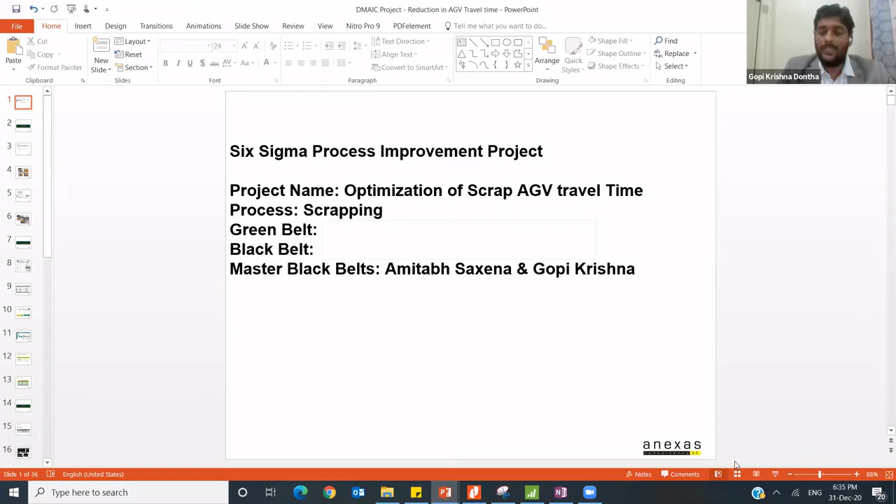So today, the first project I'm going to show you is in a manufacturing organization. This project I have guided and completed in one of the manufacturing organizations in Saudi Arabia. This is in fact an aluminum manufacturing organization. So the title of this project is optimization of scrap AGV travel time. So here in the organization, they're manufacturing aluminum, and they have different mills, rolling mills, hot mills, and cast houses.

So the scrap AGV is an automated guided vehicle. The operation of this AGV is to carry the scrap from one unit to the other unit, and when they are doing this process, the automated guided vehicle is stopping in between due to failures.

So we took up this project to reduce the travel time, especially whenever it stops and the scrap is accumulating and causing problems in the mills and workshops. So now we are going to show how we have identified the root causes using Lean Six Sigma methodology, how we implemented the solutions, and the benefits we got after implementing them.

So the process is scrapping, and the master black belts are myself and Amitabh Saxena. We have guided these projects. Before moving forward, I would like to give you a brief introduction on the process.

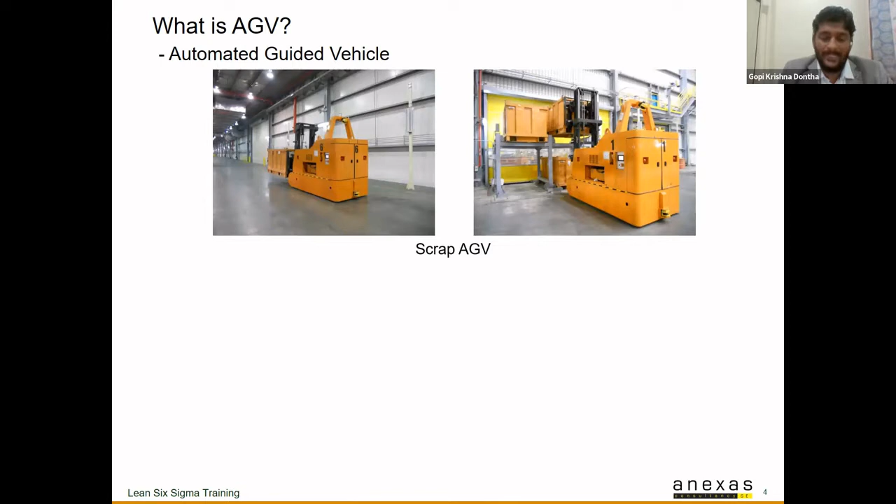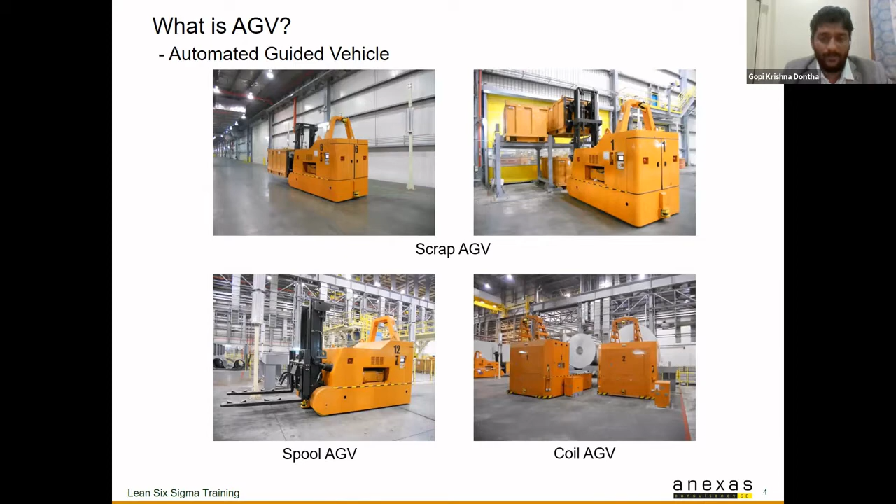AGV stands for automated guided vehicle, and this is how the vehicles look. These are the scrap AGVs, the first two pictures. This is a spool AGV, working in the mills, and this is a coil AGV, used after completing the aluminum coil. Now our focus is on reducing the time of the scrap AGVs, which are taking more time to carry the scrap from one area to another.

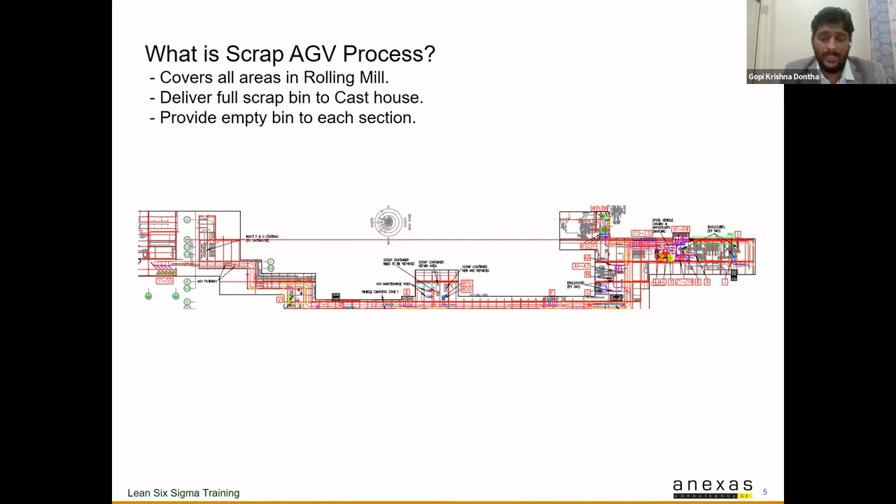This is how the plant looks. It covers the areas in the rolling mill and delivers the full scrap into the cast house, which you can see on the left side. These are the 13 stations where scrap is accumulated, and the AGV takes the scrap from these 13 stations and delivers it to the cast house. We are taking this project to reduce the travel time from this area to the cast house, and then it returns the empty scrap bins to the rolling mills.

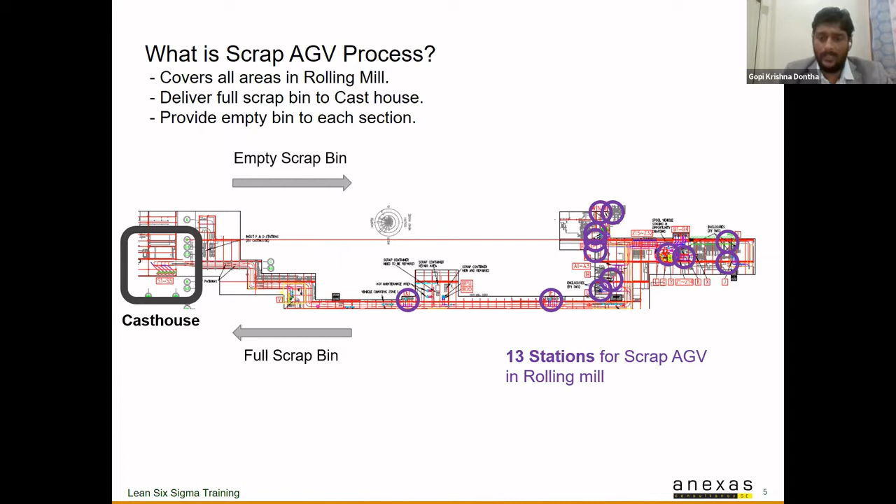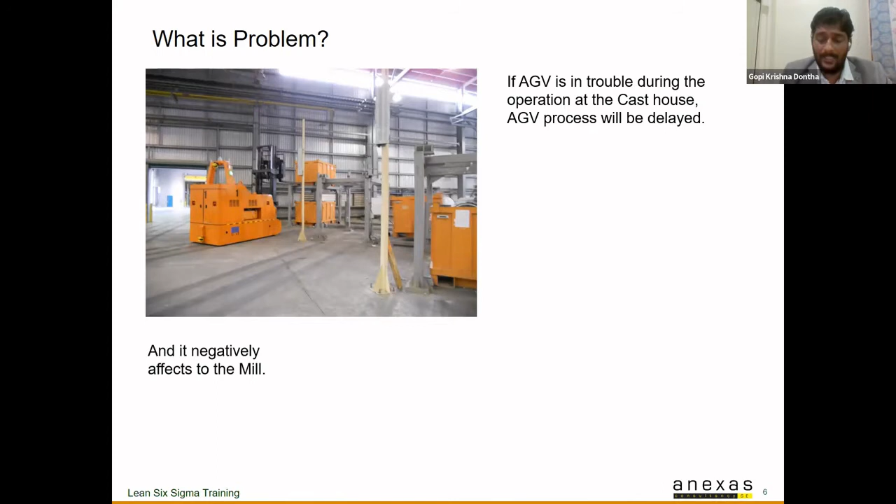So what is the problem? Sometimes the AGV stops due to failures. When it stops, the scrap is accumulated and we have production issues, and it negatively impacts the mill production. This is how it stops in between.

We implemented a DMAIC approach, and in the define phase we defined the problem we are facing in the organization. We explained in the business case why we are taking up this project. The project is linked directly to the mission, vision, and strategic objectives of the organization.

Optimizing AGV travel time will improve customer satisfaction, because we have different mills in the organization and they are the customers. It also reduces the stoppage of our AGV and encourages the AGV to have more choices to transfer the scrap. The AGV travel delay cost approximately 196,475 US dollars in financial loss over the past 3 months.

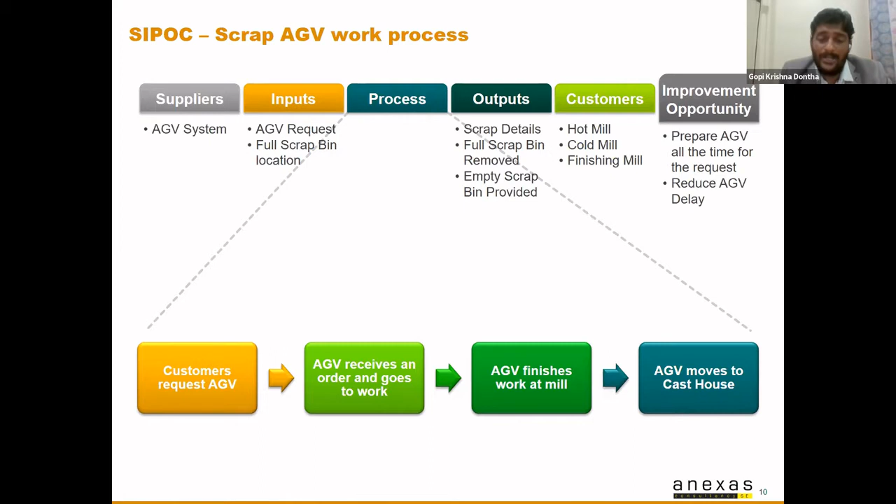And the inputs required to do this are the scrap bin, the location of the scrap bin, what kind of scrap it is, and then the request. We have the supplier who is providing the AGV, which is the AGV system. So this helps us understand the process in a high-level way.

We also have the AGV operator involved. Whenever the AGV stops in between, it sends a signal to the operator saying there's so and so problem, and then the AGV operator fixes the problem.

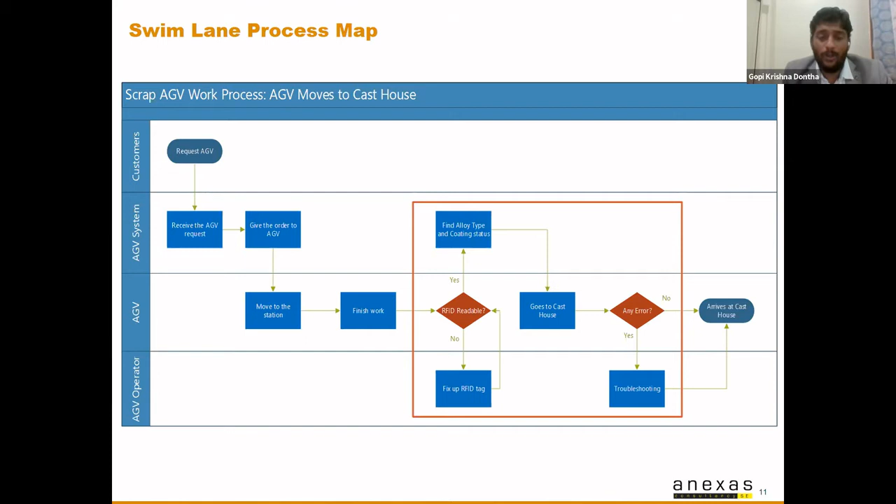Then once we understand the process, we further collected the voice of customer. We use QFD to understand the voice of customer.

When we collected the data, we came to know these are the problems customers face from the AGV: the AGV is not available, it arrives late, it stops in between during the work, it shows some errors on the path, and it is also causing some problems to the work.

We assigned some priorities. The first priority is rated on the higher side, which is 5, meaning very important to the customer, and then 4 after that, followed by 3 and 2. So first we are focusing on solving the problems which are AGV not available and late arrival of AGV, and then AGV stoppage during the work.

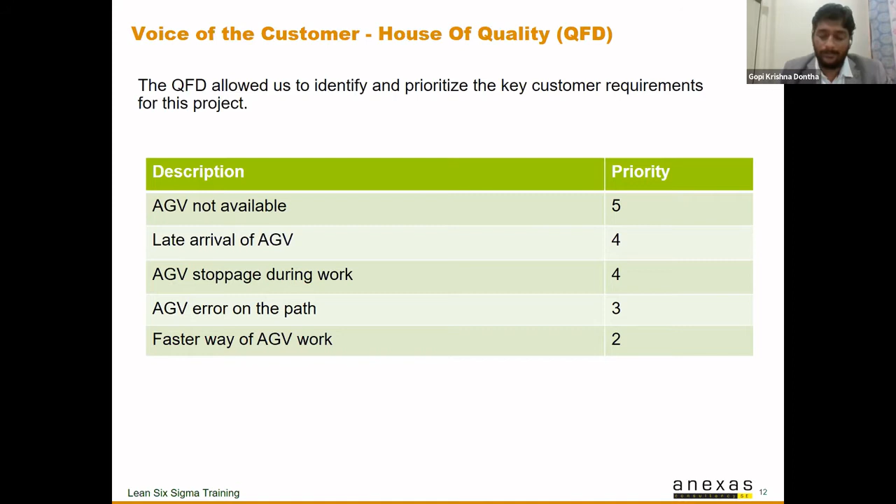Then this was about the define phase. We have defined the problem, collected the data from the customers, given priorities, and also understood the process at a high level.

Once we define the problem, we move on to the measure phase. What we need to do in the measure phase is collect data from the process. The data is from the AGV system database, and we collected the last 3 months of data, from June to August 31st, 2018. The data collected from the AGV includes AGV transaction life cycle, AGV optimal transaction time, charging time, and delay time. These are the data factors we identified and collected.

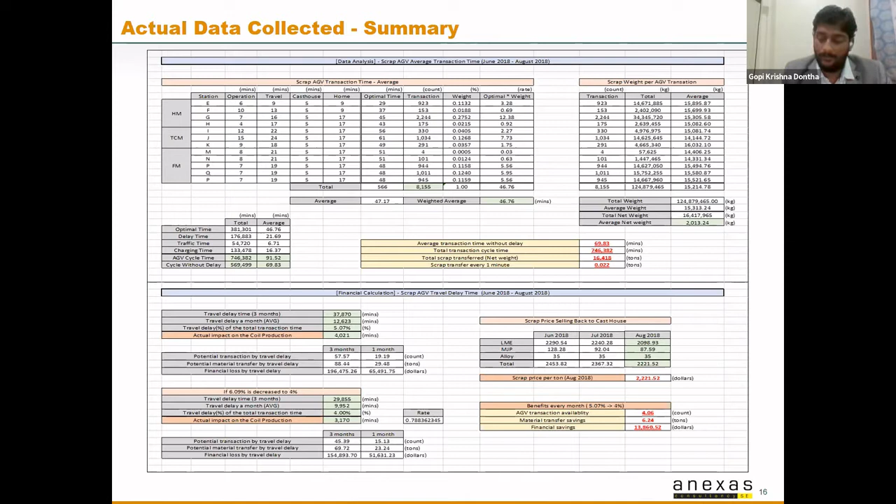Once we collected the data, we started understanding how the process is behaving, whether the data is normal or not. You can see this graphical summary which tells us the average travel time of the AGV, the standard deviation, and other descriptive statistics.

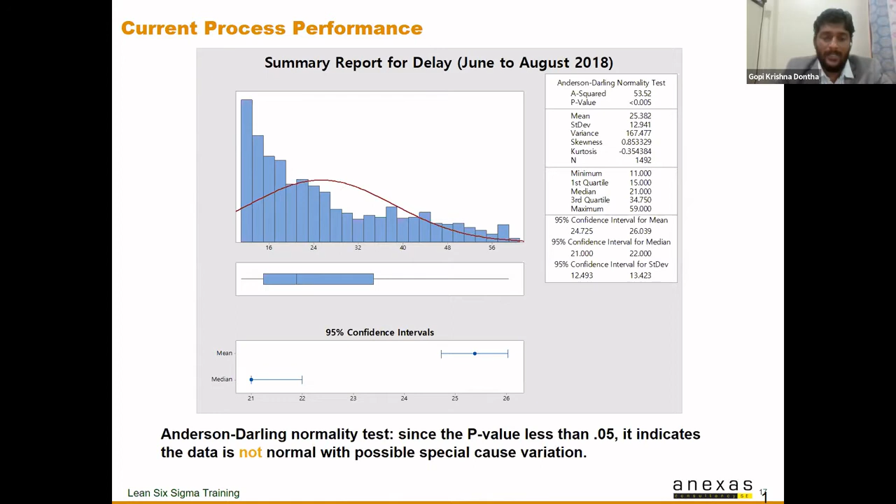We also looked at the normality of the data, whether it is normally distributed or not. Based on the graphical summary, we got a p-value less than 0.005, which means the data is not normal. The test we did is the Anderson-Darling normality test, and since the p-value is less than 0.05, it indicates the data is not normal.

Once after collecting the data, we started understanding the capability of the process. We measured the sigma level of the process and understood the Cp, Cpk values. The sigma value of our process was 2.19 sigma.

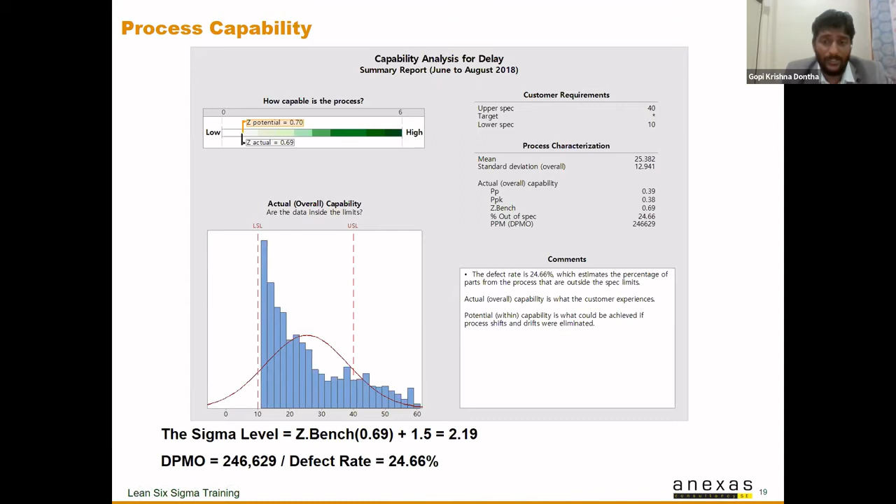The defects we are producing are whenever the AGV stops. Currently, out of 1 million opportunities, the defect rate is 24.66%, and the DPMO is 246,629. We set the upper and lower specifications: lower is 10 minutes, and upper is it should not take more than 40 minutes. Whenever it takes less than 10 or more than 40, it's a defect for us. So we have a total defect rate of 24.66% in the current process, and the sigma level was 2.19.

This was understanding the process performance. Once we understood the process performance, we started collecting information on why we are having 24% defects and what are the problems causing these failures. We conducted a brainstorming session with the people working with the process, and we also collected data on the failures.

The most frequently occurring failures are RFID failures on the AGV, obstacle detected, and AGV lost its position. We did a Pareto chart to understand the most frequently occurring cause. Out of these three, RFID failures occur very frequently, approximately 71% of the time, followed by obstacle detected and then lost position. So the most frequently occurring causes are RFID failure and obstacle failures, and we are going to work on these causes.

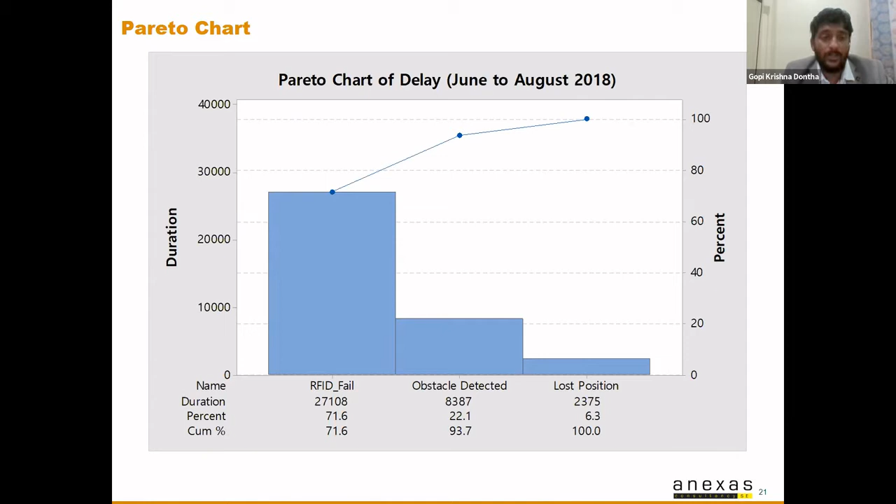And then we did a further cause and effect diagram. We performed brainstorming with the process owners and the people working in the process, and we identified the possible causes or potential causes.

So these are the potential causes because of which the AGV is taking delayed travel. We have named them X1, X2, X3, and X4, and we have categorized those causes: RFID read failure, obstacle sensor failures, laser scanner issues, and delay response from the operator.

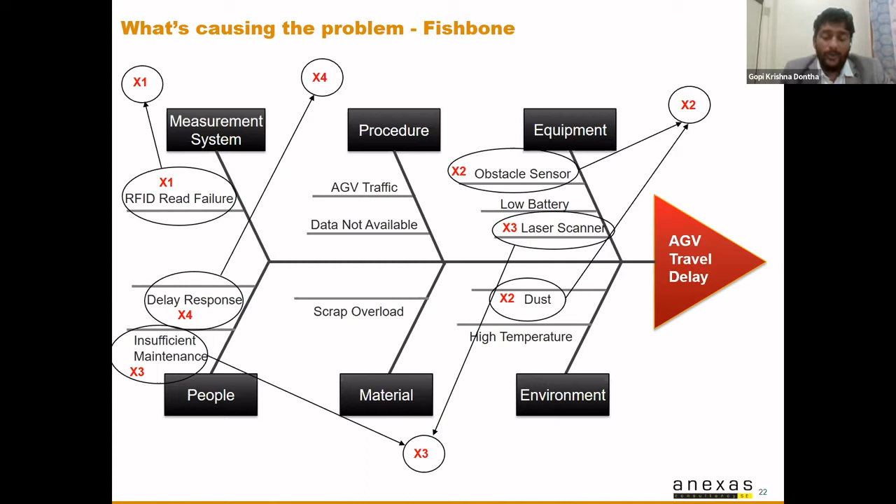So now what we are going to do is validate all these causes by using statistical tools: hypothesis testing, ANOVA, Pareto charts, and graphical summaries. So now we're going to validate these causes.

We then collected data on the X factors and started analyzing them. X1, the first X factor, is the RFID failure. We have 10 AGVs total, automated guided vehicles, and the X factor is the RFID failures across these 10 different AGVs. Are these 10 AGVs having the same RFID failure, or are they different? This is what we want to understand.

We collected the data on all 10 AGVs and performed ANOVA because there are more than 2 levels in the X factor. The null hypothesis is that all of the AGVs have the same RFID failure problem, and the alternative is that they have different failure rates.

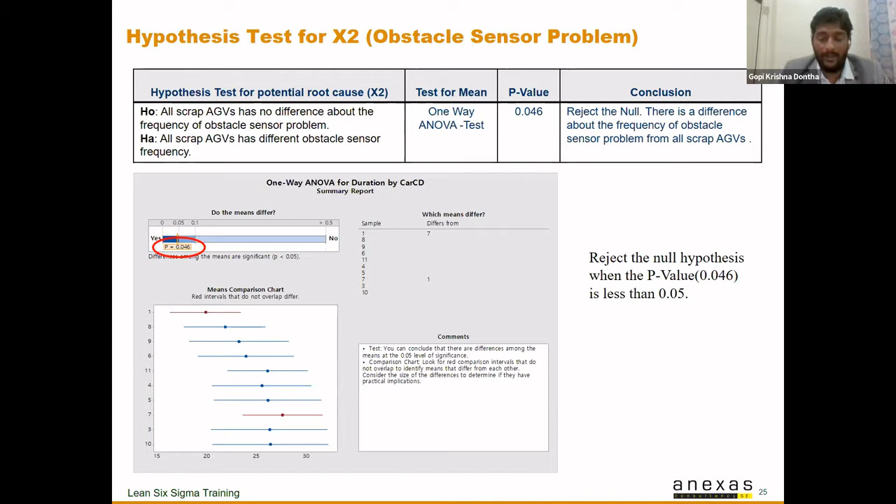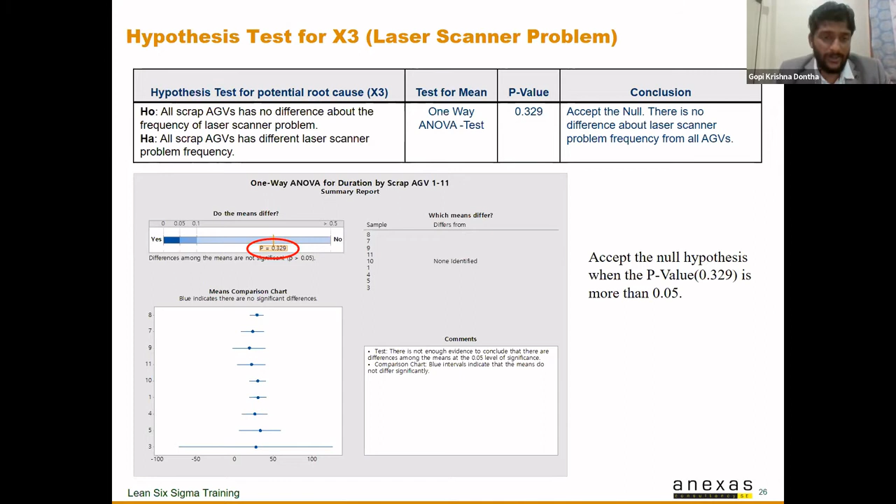Then the other X factor is delay in response from the operator. We have two operators working on day shift and night shift.

So is the response time between the operators the same between the shifts, or is it different? So we collected the data on the response time, and here we have the two shifts: one is a night shift and one is a day shift. So we performed a 2T test because we have two groups, the day and night shift. We came to know that the day shift is responding in less time as compared to the night shift. That means the night shift is taking more time.

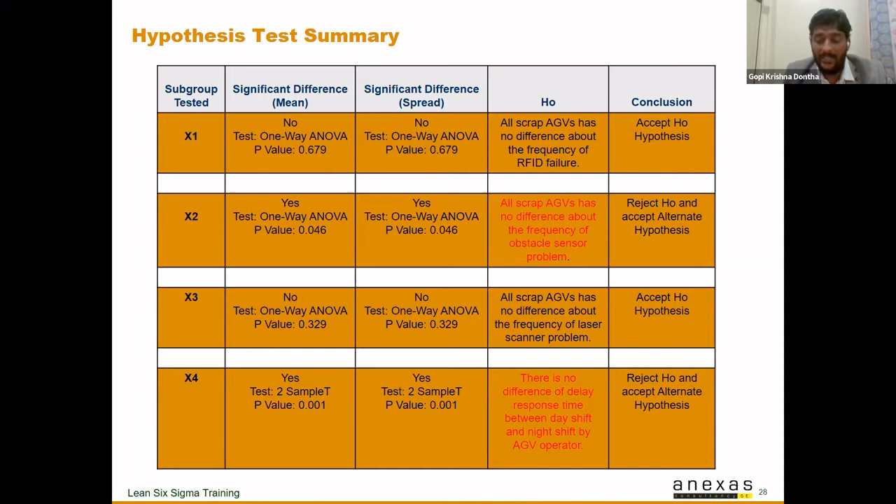So by doing the root cause analysis, we came to know that X2, which is the obstacle sensor problem, and X4, which is AGV operators in the shifts, are causing the delay in travel of AGV. So we have identified, from the potential causes, the root causes. From the 4 causes, now we came to know that X2 and X4 are causing the variation in the travel.

So once we implemented the solutions, we further collected the data on the process, and we compared the performance of AGV travel time before with after data. So earlier we had a mean of 25 minutes, and after, the mean is 20 minutes. But is it a significant improvement? That's why we performed a capability analysis before and after.

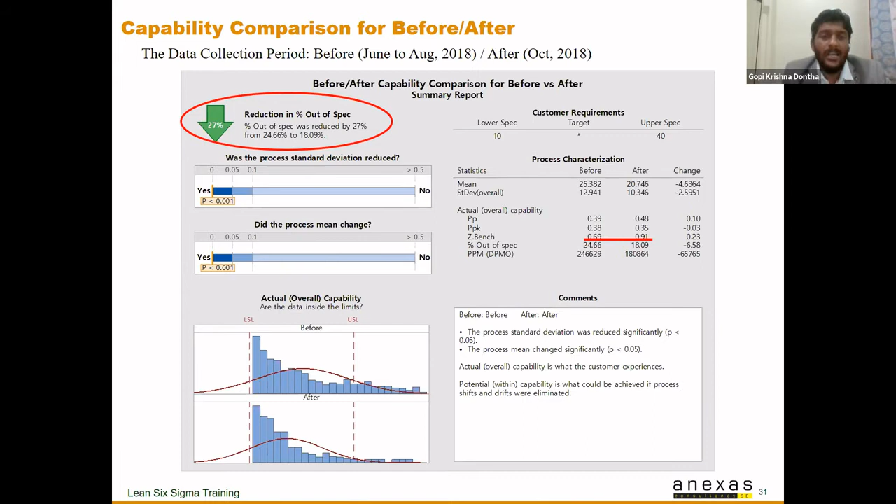And then we also compared the performance of before and after by doing the hypothesis test called 2T test. Before, the travel time was 25, and after, the travel time is 20 minutes. But is it significant? So we framed the null and alternate. Null is there is no difference, before is equal to after time, and we believe that after implementing the solutions, the travel time has reduced. So it means after is less than before time.

And then the p-value produced was less than 0.001, which means the improvement is significant. So after implementing the solution, the travel time got reduced by 5 minutes. So once we saw the improvement, we put a control plan in place. This is a control plan. We will have to continuously monitor the process. Otherwise, if we do not monitor the process, it might fall back to the earlier stage. That's why we made a control plan.

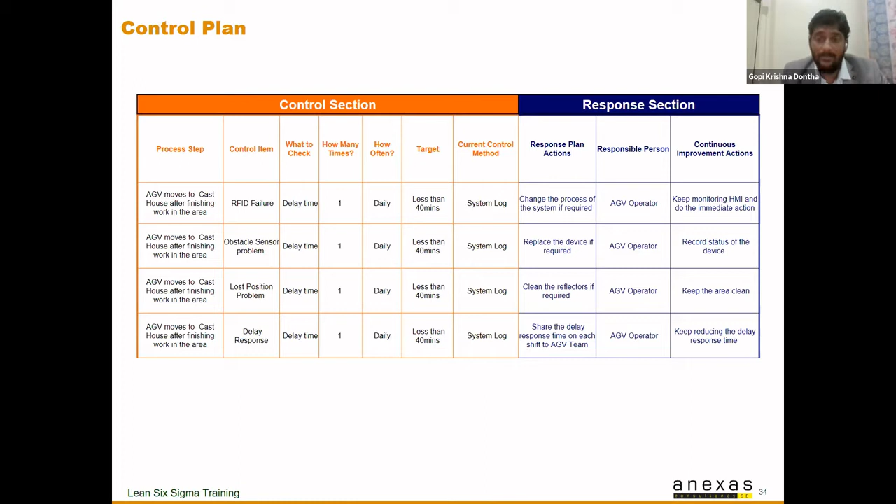So these are the people and these are the actions that need to be taken. So what is the process step, what item is to be checked, how many times it is to be checked, what is the frequency, what is the target, how to check, and then what is the response. So on the left side you can see the control section, and on the right side you would see the response section. These are the controls and responses.

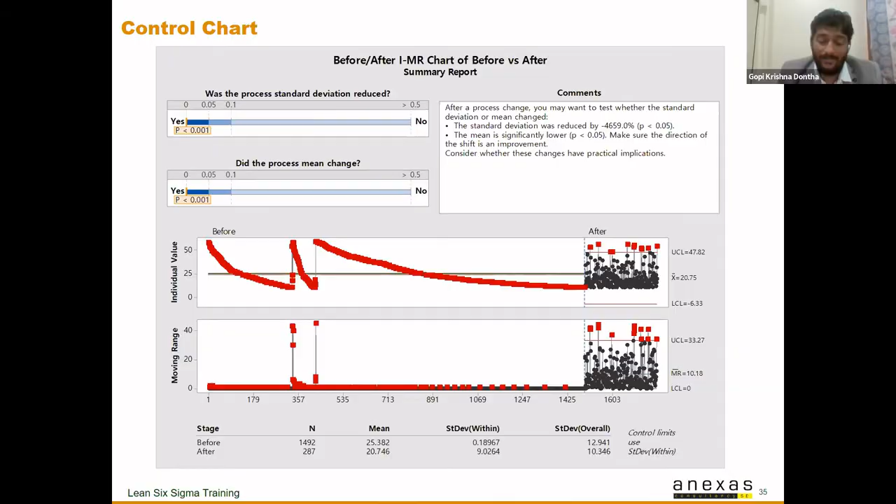So these are the control charts of this process. So this was about the project, which is AGV travel time. So by implementing the tools and techniques of DMAIC, the Six Sigma, we were able to reduce the travel time of this AGV, thereby saving thousands of dollars per month. So this was the project. So let us also see the other projects as well.

Now I'm going to show you a project which we had done in railways, by using the same DMAIC approach. This is also focusing on reducing the time, reduction of cycle time in repairing the coaches. So same, we used a DMAIC methodology. So in the define phase, we have defined our problem.

The first thing that we did was, we understood the process in a high level way. And here the process is, there's a timeline to repair the coaches. So every 12 months, every 36 months, or every 48 months, the coach has to come back to the workshop, and it has to be overhauled completely, and then they put this coach in the line for travel purposes. So this is the corrosion repair of periodic overhauling of the non-AC ICF coaches.

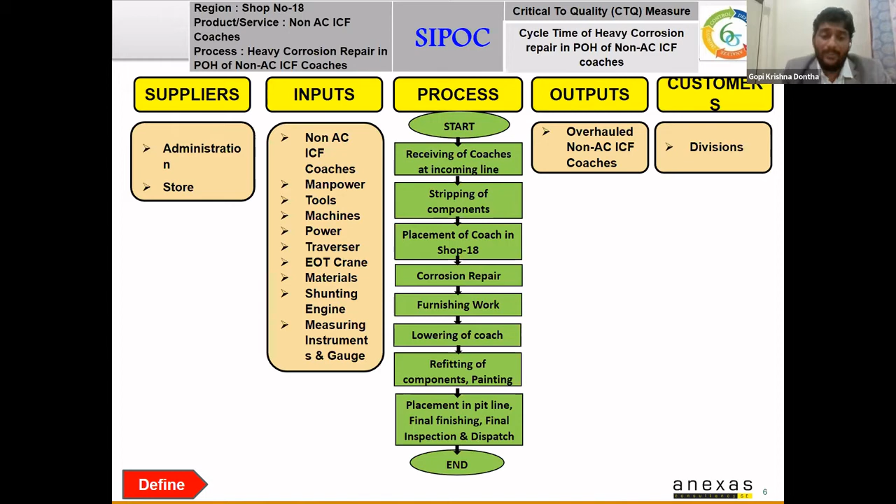Then we have the suppliers who are providing these inputs. So administration is providing the inputs, and also the store. So these are the suppliers. So we have understood the process in a high level way. And then we started framing the project charter, explaining what is the problem that we are facing in the organization, and what is the goal that we would like to achieve.

So the problem was the cycle time. As we said earlier, to do overhauling of one coach, it was taking 39 days, right? Our target given by the management was only 32 days. So our goal is to reduce this 39 days to 32 days by March 2020. This was completed last March, just before COVID.

So what are the benefits? Why are we doing this project? Are there any benefits of doing this project? Yes, there are benefits. By reducing the overhauling time from 39 days to 32 days, savings of 114 lakhs can be achieved, and that also improves the reliability of ICF coaches which are dispatched. So these are the monetary benefits.

And then team members are there who helped us in completing the project. And the scope is only from receiving the material to final dispatch of the coach. This is the scope, the starting point and end point of the process. And then the CTQ is a measurable term, which is the cycle time of ICF coaches. And these are the timelines: define, measure, analyze, improve, and control.

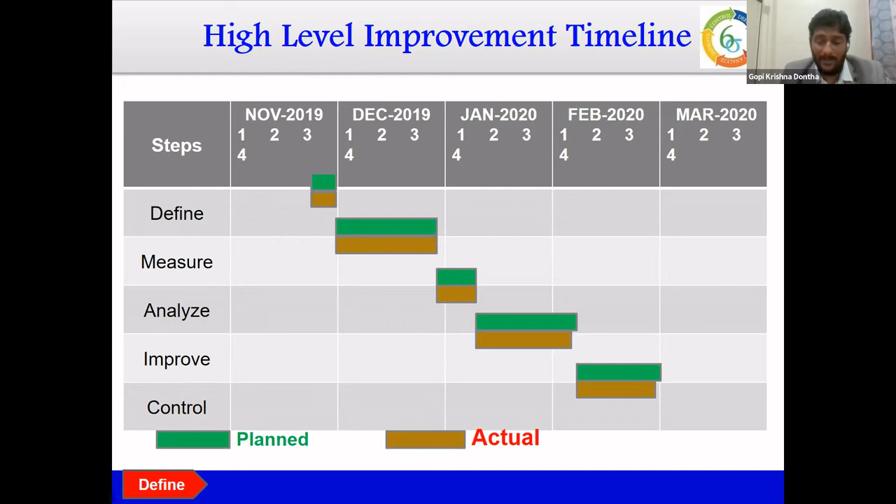So once we complete the charter, we collect the signatures from the stakeholders, and this is the agreed timelines and agreed problem statement and goal statement from the stakeholders. There is a Gantt chart which would help us keep on track to complete the project. So this was the CTQ.

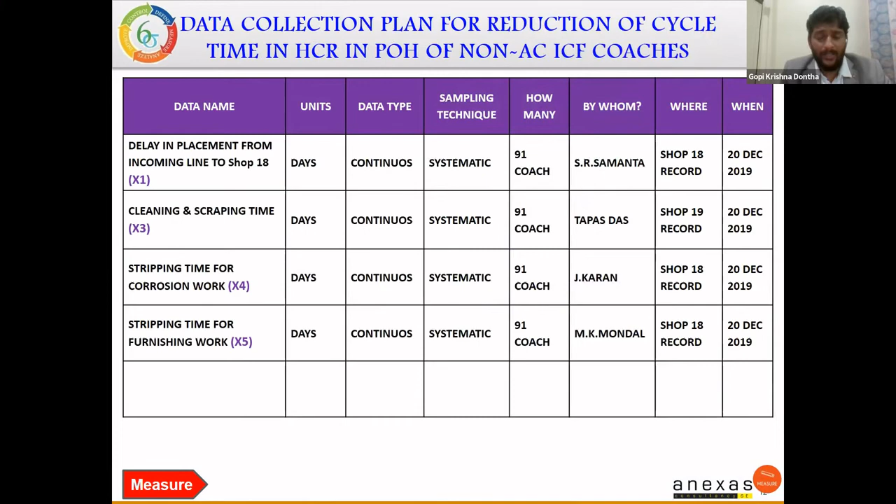Then once we identified the problem, we started collecting the data on the Y output as well as the X factors. So we have identified the factors which are causing the delay in the POH overhauling, and these are the X factors and Y factors. We have named them as X1, X2, X3, X4, X5, 6, 7, 8, 9, 10. So in total, when we did the brainstorming with the process owners and the team members, we came to know that there are 10 X factors which are possibly impacting the cycle time of the overhauling.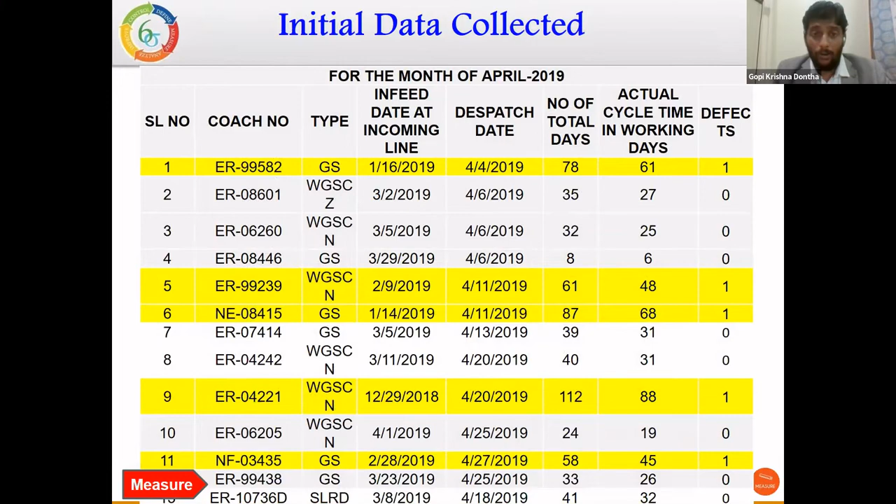And then we collected the data on the output, which is the cycle time, from around 90 or 95 samples, and this is the data which was collected from the process.

So you can see the total number of working days, what date it is received and what date we dispatched, and what is a coach number and what type it is, and then what are the actual number of days, and then working days, and then is it a defect or not.

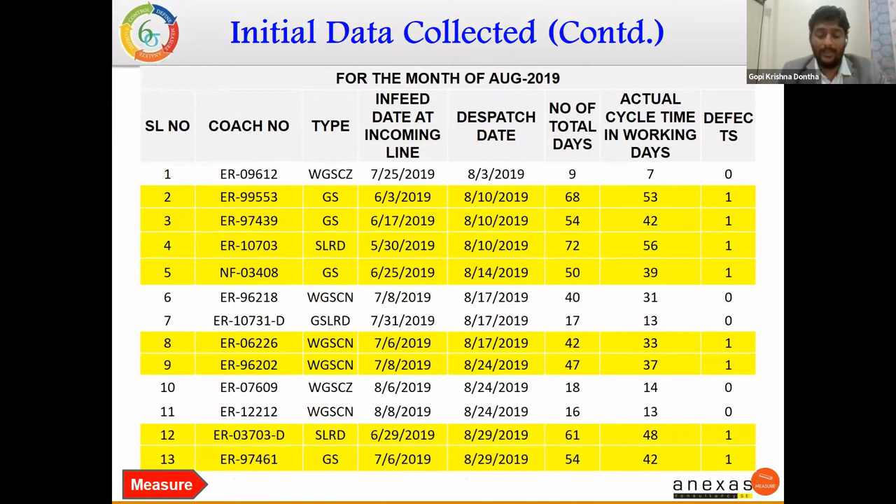So if you see here, wherever you see the highlighted in yellow color, they are the defects because they are taking more time. The given time is 32 days. If you look at the highlighted ones, they are more than 32 days. So that's why we highlighted them as defects.

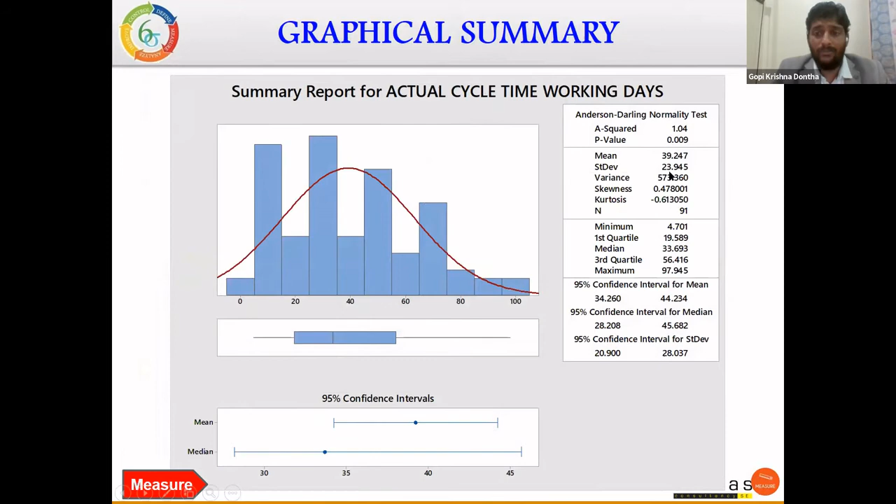Out of these many samples, once we collect the samples, we have started understanding what is the average cycle time. So the average was 39 days. So we were taking 39 days to do the overhauling of the coach with a standard deviation of 23 days, which is very high. And also we measured the sigma level of the process, and the DPMO, defects per million opportunities, are, if you look at here, 618,922 out of 1 million.

So what if we do 1 million coaches? What are the chances of producing defects? The chance of producing defects are 618,000. So on a sigma scale, the sigma level of the process was 1.2. So we were able to meet only 1.2 sigma.

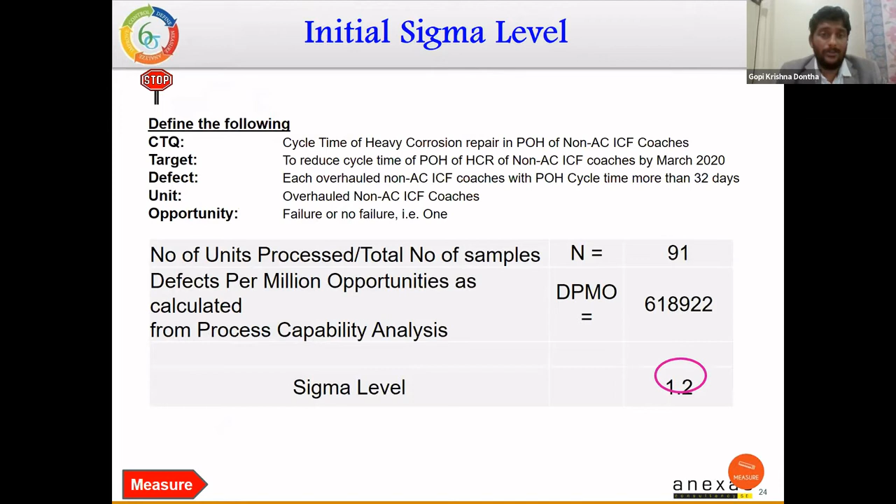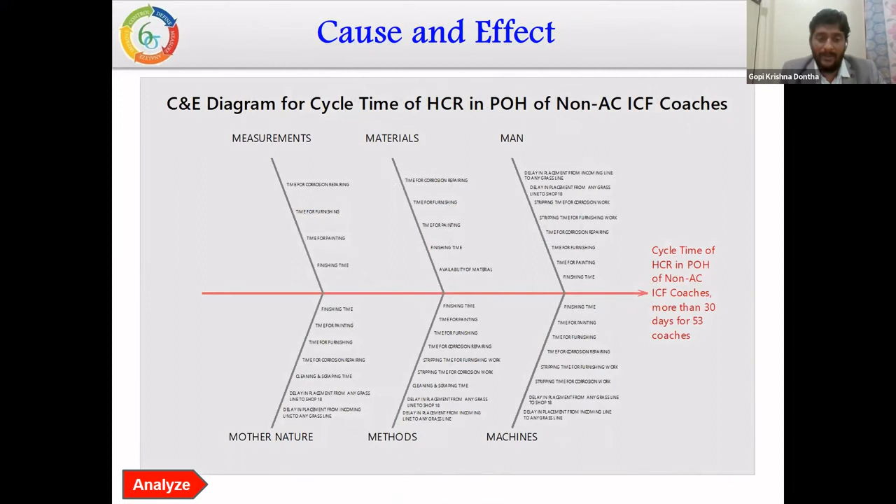So once we understood the sigma level of the process, we moved to analyze phase. We collect the data on those X factors. We did a brainstorming session and performed the cause and effect diagram. And we have identified many causes, and we have also categorized those causes under the 6 M's, like man, machine, measurement, material, mother nature, and methods. So these are the causes.

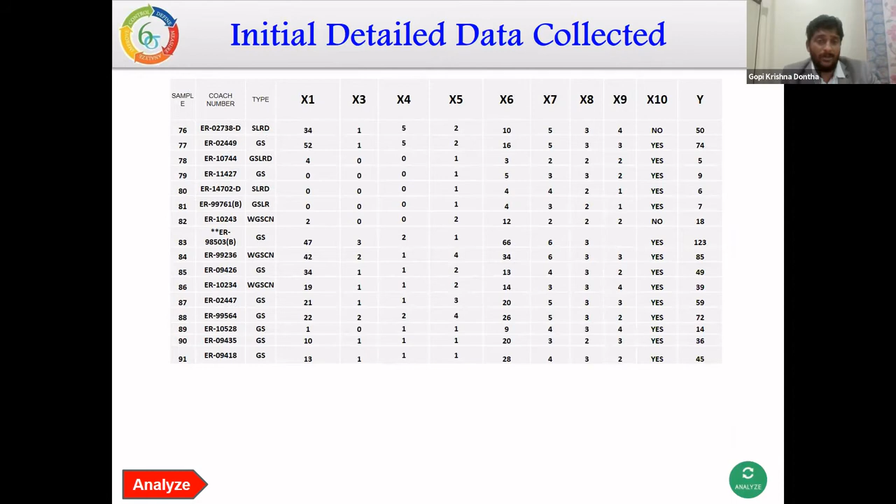And then we have further collected the data on the X factors. If you see here, this is the data on Y. Y is the cycle time, and these are the X factors data. So X1, what was the time? X2, X3, X4, X5, X6, 7, 8, 9, 10. So all the X factors data which was collected from the process. Now we are going to validate these causes. Is the variation in the cycle time because of this X1 or because of X2 or is it because of X3? So these are the 10 possible causes.

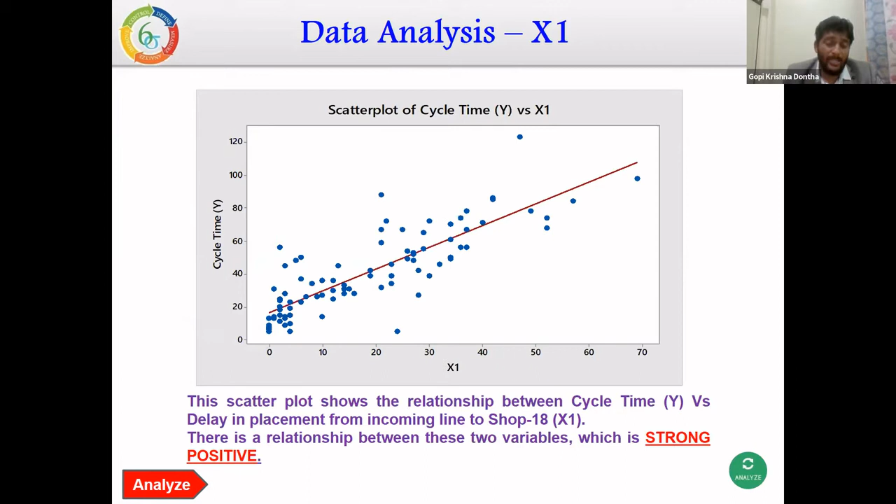So this is X1 with Y, and we came to know that this is having a strong relationship with your X1. So why is it a strong relation? Because if you look at here, when you are taking more time in the X1, the Y, which is a cycle time, is also increasing. If you want to reduce the cycle time, you need to focus on reducing the X1. So this graph is called a scatter plot, which shows the relationship between two variables.

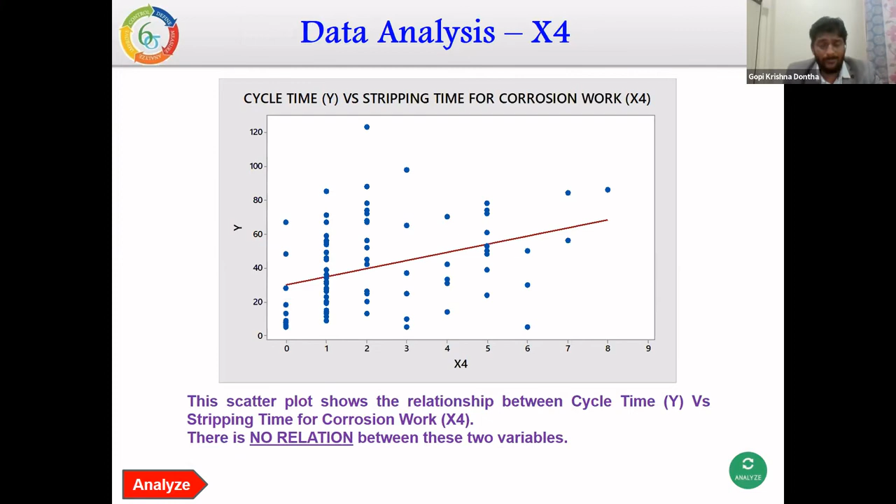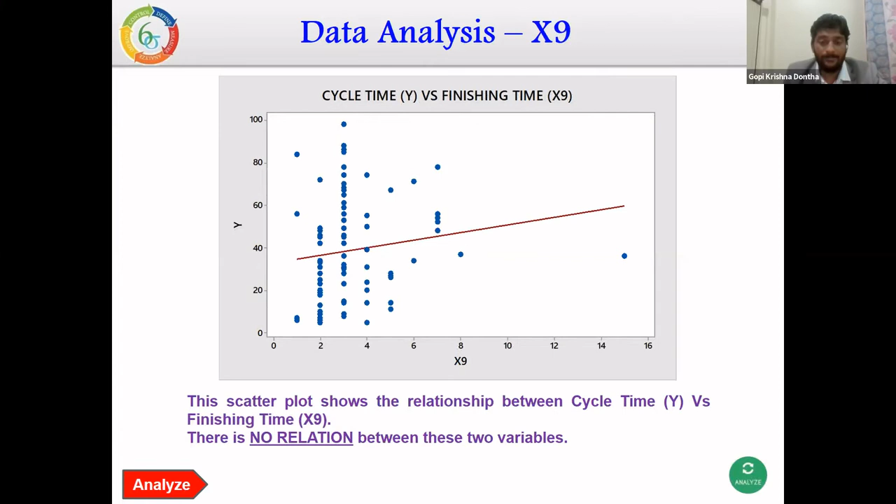So by doing this analysis, we came to know that these are the three causes among those 10. These are the three causes which are affecting the cycle time. So out of 10 numbers data collected, following are the main root causes. These are the causes which are affecting our cycle time. So what are we going to do now?

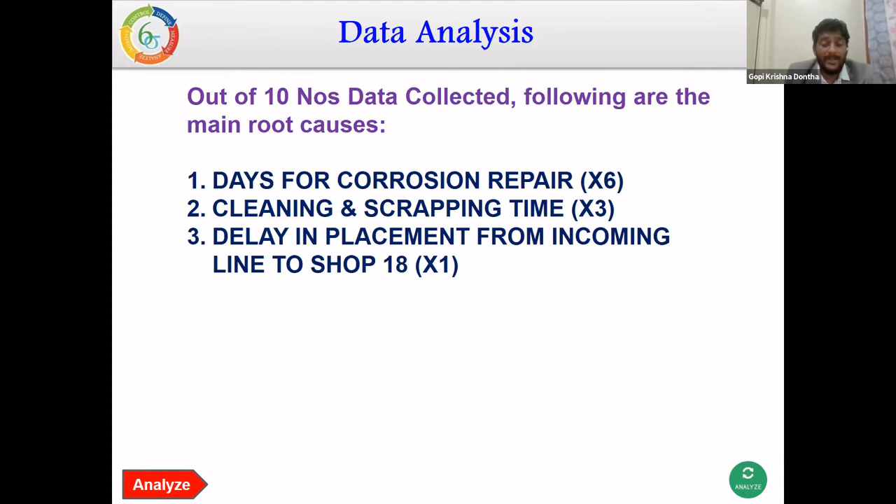So after identifying the causes, we implemented the solutions. We used some brainstorming tools. There's a technique called 635 technique. So we used this 635 technique, and we had completed generating the solutions. And these are brainstorming activity. These people are involved in the project. They're doing the brainstorming to identify the solutions.

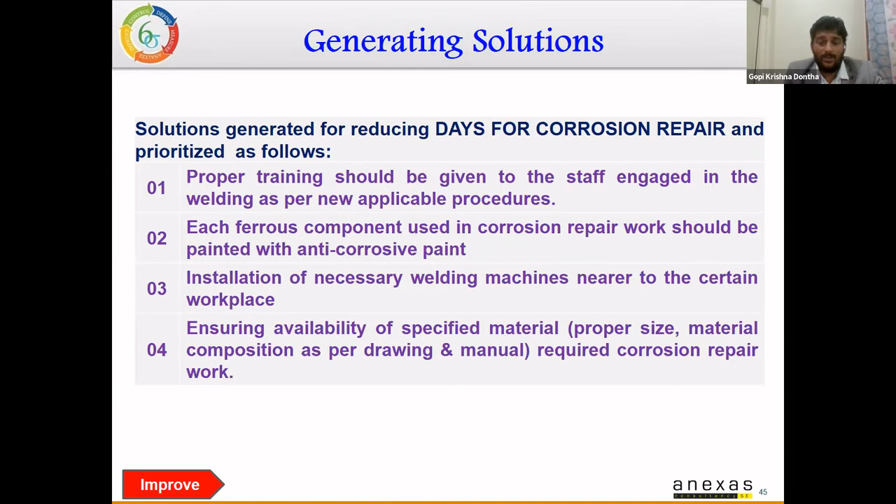So these are the solutions of each cause. So they've generated for each cause 4 or 5 solutions, and then later on we have also done the solution selection matrix. So out of these 5 solutions, which solution shall be implemented? So we did that exercise, and we had chosen the solution, and then this is the solution implementation plan.

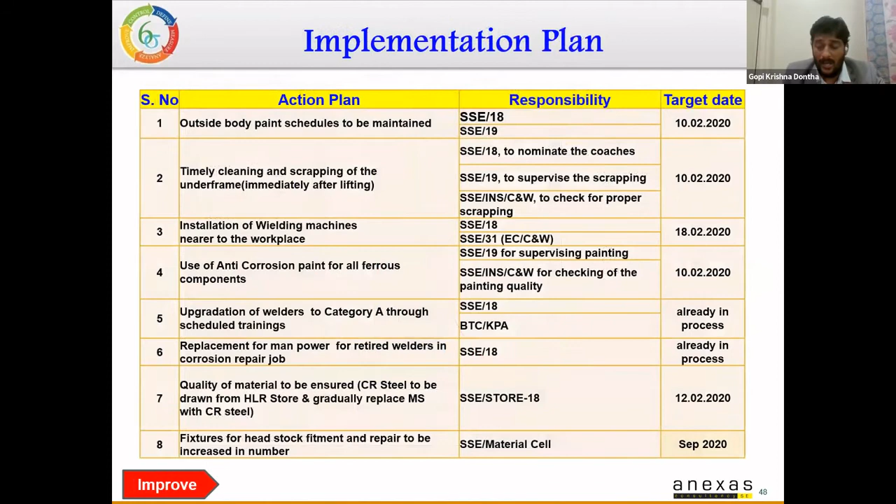So what action is to be completed, who is responsible to implement that action, and what is the target date. So after implementing the solutions, we further collected the data. We had collected the data, and this was the data, and we also looked at the performance of the process, and the defect rate was reduced, and the sigma level also has improved a little. So earlier it was 1.2, now we have moved from 1.2 to 1.3.

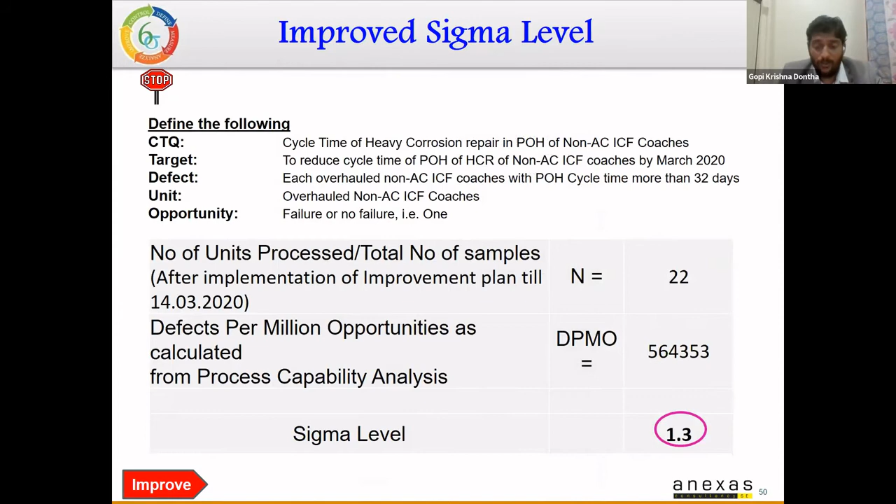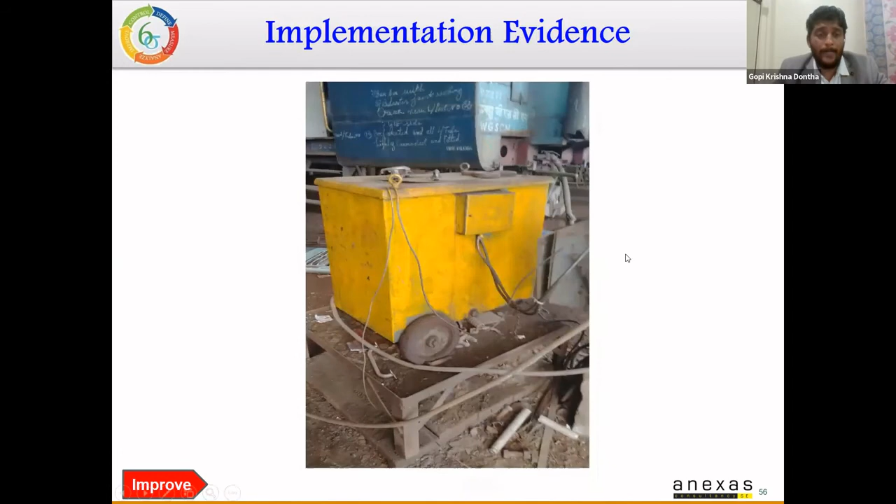There's a slight improvement. Then we also have to show the management that for whatever solutions were implemented, we have started collecting evidence whether people are following the solutions or not. We had collected the evidence, and these are the evidences. And then there are some more photographs, and these are the photographs of the solutions which were implemented.

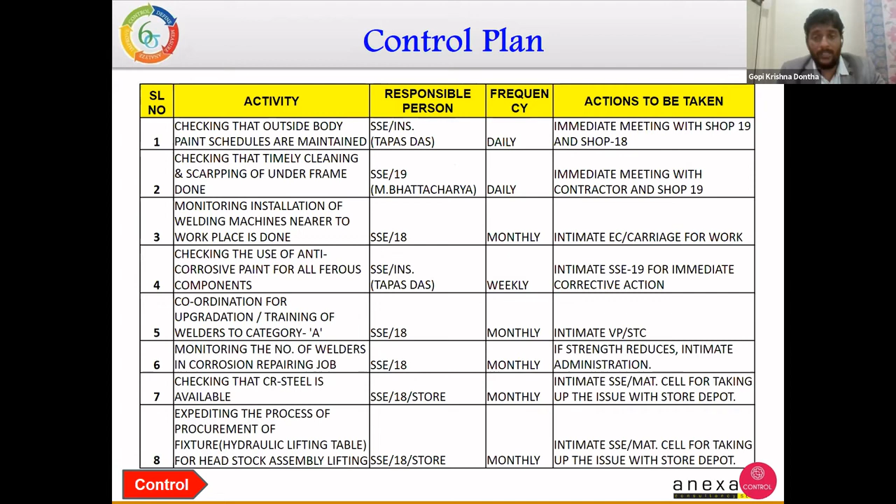And then what are the benefits after implementing the solution? There are some monetary benefits and there are some intangible benefits. So monetary annual savings are 43 lakhs 74,000 per year after implementing the solution. And the intangible ones are it reduces the cycle time, customers will be satisfied, and it improves the morale of staff, etc. These are the intangible benefits.

And these are the technical learnings and team learnings. So they got to know more statistical tools like cause and effect diagrams, scatter diagrams, control charts, Pareto charts, and brainstorming techniques. And it improved their skills. So this was the second project.

Now I'll quickly run through the third project as well, because we are running out of time; we have 15 more minutes. So let me quickly show you the third project, which is from a service organization. The objective of this project is to reduce the delays in constructing the surveillance towers. So the project name is reduction of delays for surveillance towers construction.

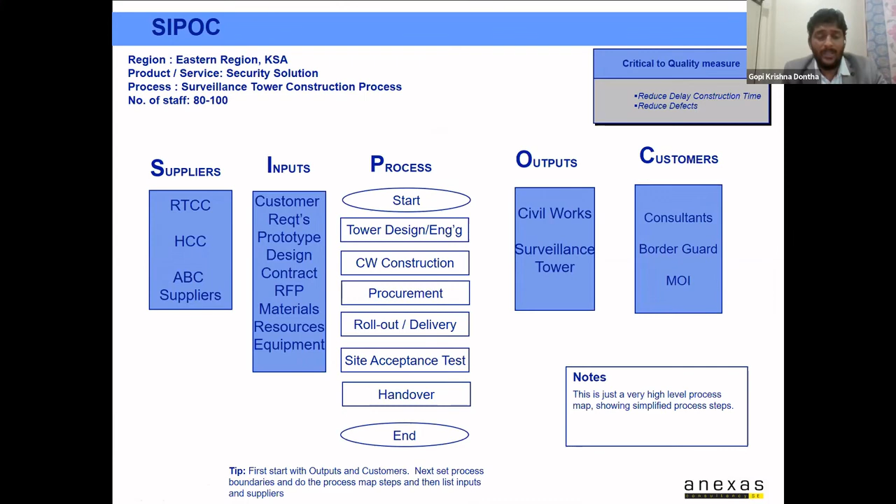So define phase, the same process, SIPOC. We have understood the process at a high level, and these are the customers, and the output is the surveillance tower, and the process is designing, construction, procuring the items, then roll out or do the delivery, then do the inspection, and then hand over to the customer. There are many inputs, and these are the suppliers. And then this is the project charter.

We have collected whatever data we have with us from the last 2 years. As per the data, there was a delay in constructing the towers, which is 3 months. For each tower, we are taking more than 3 months. So the objective of this project is to reduce the 3 months to 0 by October 2020. And what are the benefits? The monetary benefits are approximately 864,000. If you reduce the time, it increases the revenue. And these are the timelines. Then we have the Gantt chart.

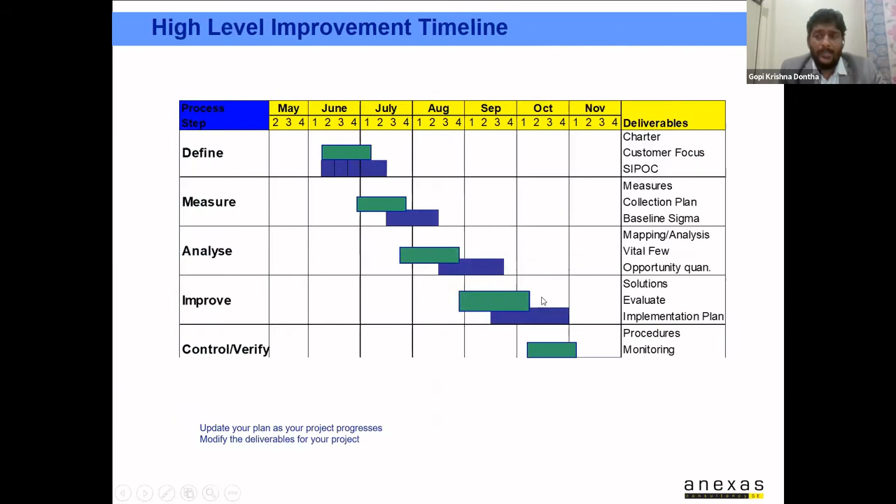Then measure phase, we collect the data on the output and also the X factors. So we are choosing the data on time to construct the towers, how many samples, which is 21 towers we had constructed, and then this was the data collection, continuous data type, and the source, etc. And these are also the causes. Once we collected the data, we did the histogram to understand the average time taken to construct the towers. So on average, we are taking 25 months. This is in months.

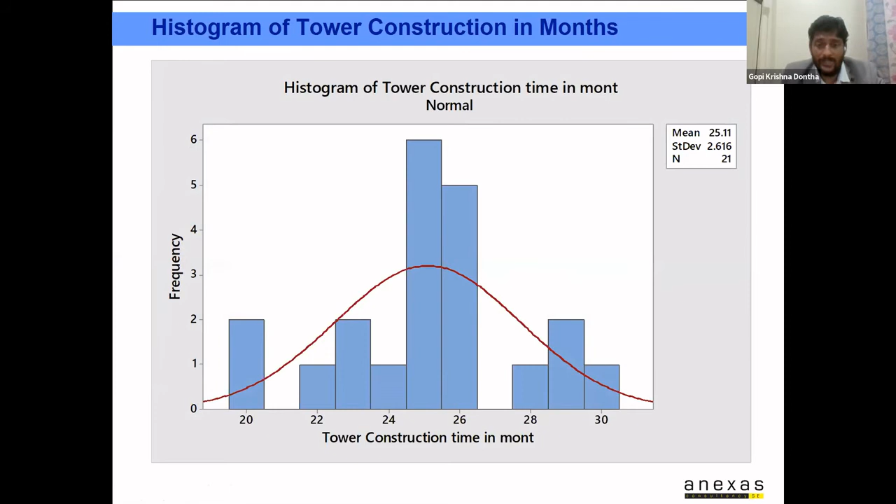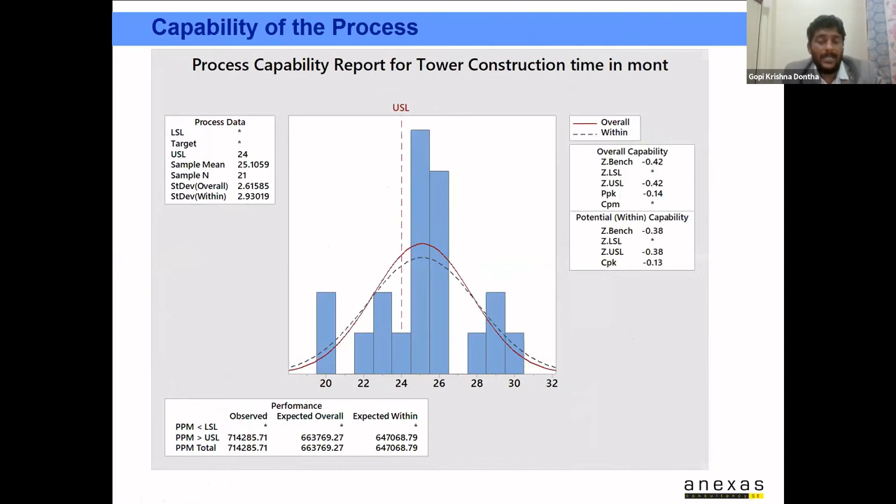And then these are run charts just to look at the trends and patterns in the data. And then we measured the sigma level of the process. So we have 21 towers total. Constructed towers are 21, out of which 15 towers had taken more time than the target, which is to complete in 24 months. But these 15 project towers have taken more than 24 months.

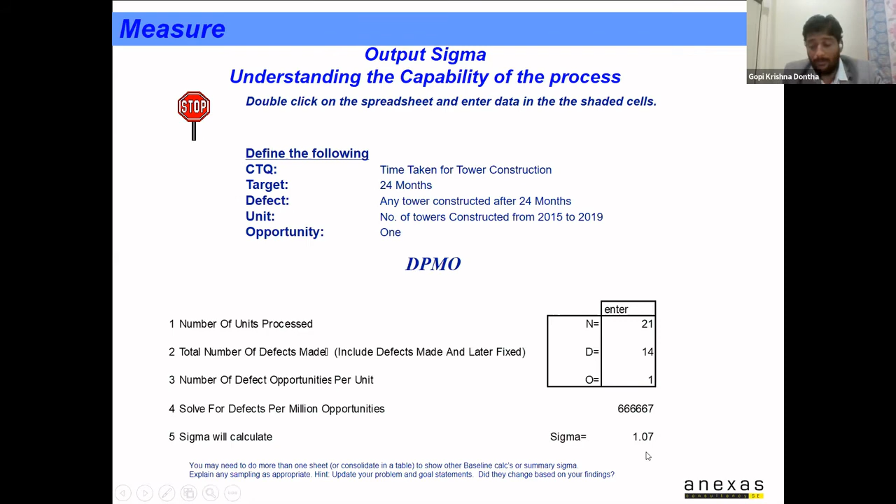So the DPMO is 666,667, and the sigma level of the process was 1.07. This was about the measure phase. Then we did the cause and effect diagrams and identified the possible causes why there were more delays in delivering the towers to the customer. So these were the possible causes.

And we also used a tool called control impact matrix to prioritize those causes, because there were so many causes; some causes are out of our control, and some are in our control. So we used this control impact matrix to see what causes are in our control, and if controlled, what is the impact on our problem? Are they going to be impacting highly, medium or low?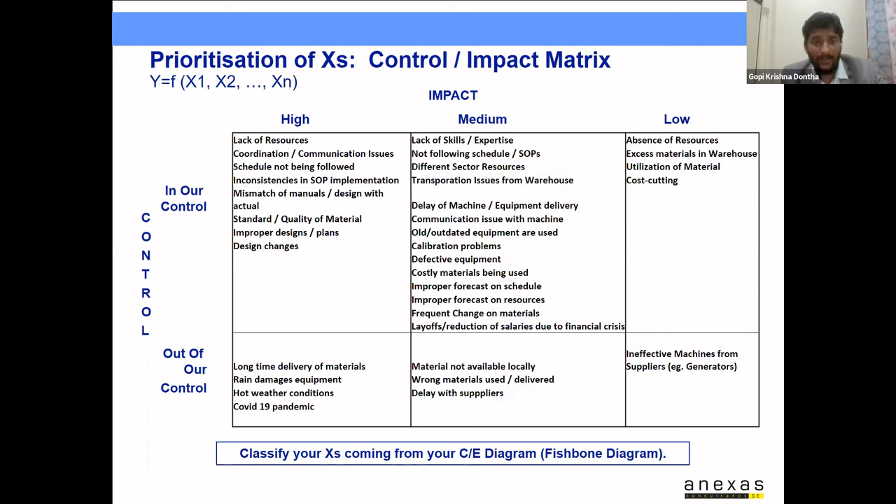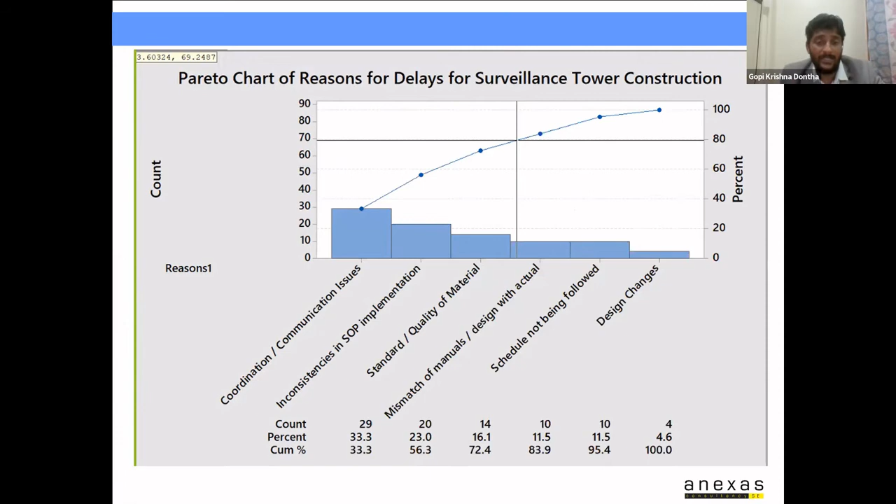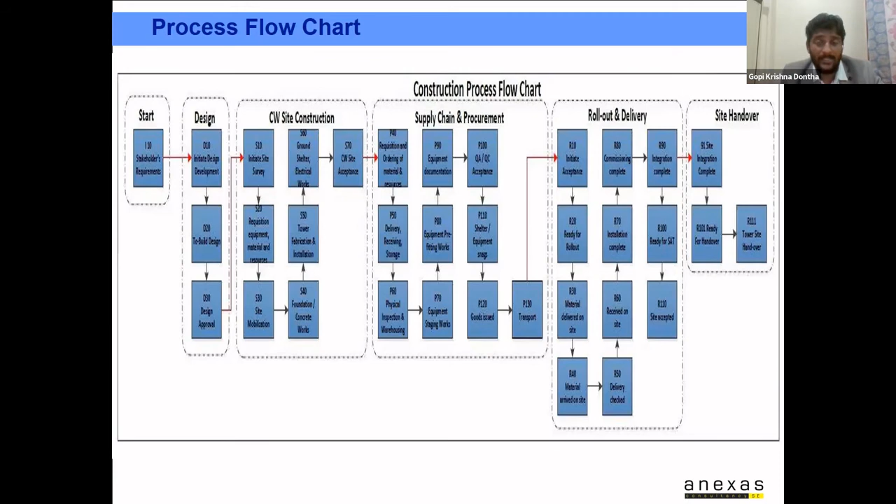So we used this, and then we collected the data, and we did a Pareto chart to see which cause is most frequently occurring. So we came to know that communication issues, inconsistencies in implementing SOPs, and quality of the material are the most frequently occurring causes. And then we also started understanding the detailed process flow chart of the construction of these towers. These are detailed process flow charts.

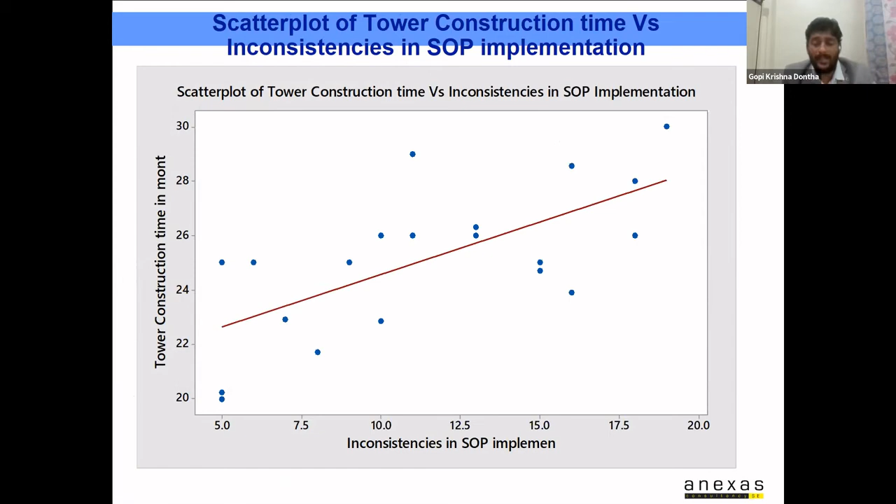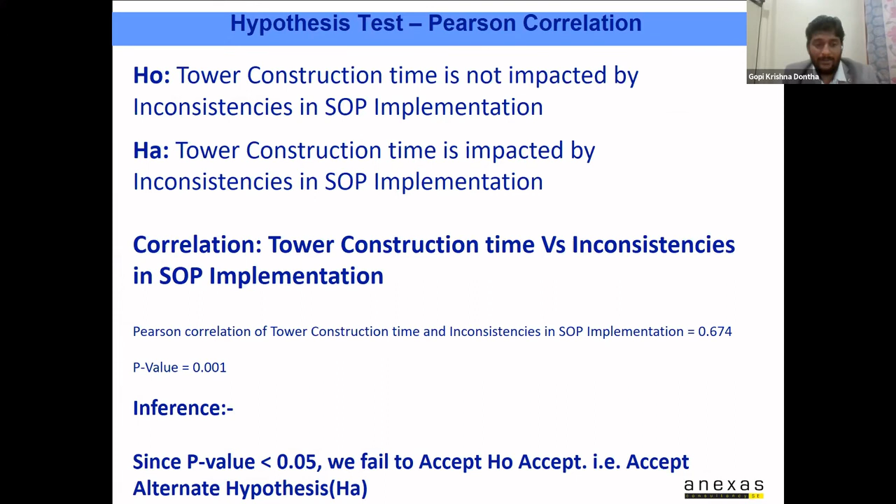And then the other X factor, which is inconsistencies in SOP implementation, the time taken to follow the SOPs, and the construction time in months. So the null says whatever X we have here is not impacting the Y, and the alternate is that it is impacting the Y. So the p value is 0.001, which means we accept the alternate: the tower construction time is impacted by the inconsistencies in SOP implementation.

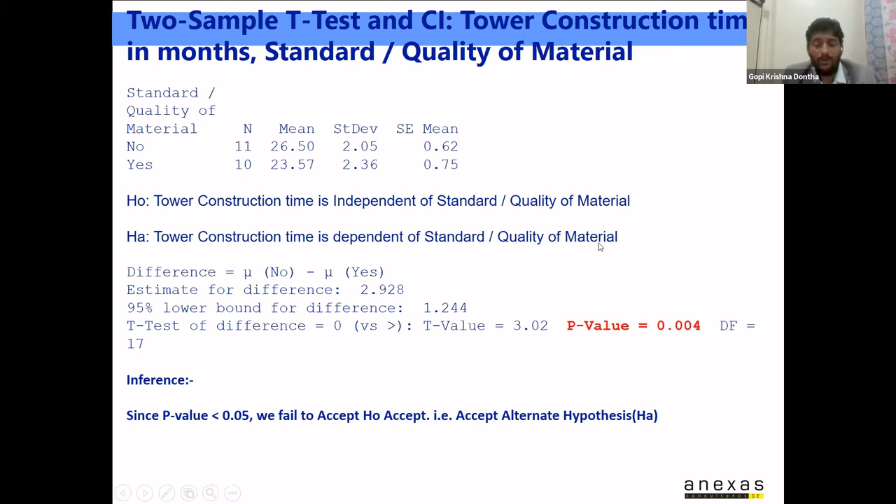And then for the quality of the material, we performed the 2 sample t-test, with standard material quality yes and material quality no. And the p value is 0.004, which means that we have to accept the alternate. So tower construction time is dependent on the standard quality of the material. If you have good quality material, the construction time will be less. These are the conclusions. These are all the 3 causes which are affecting the Y output.

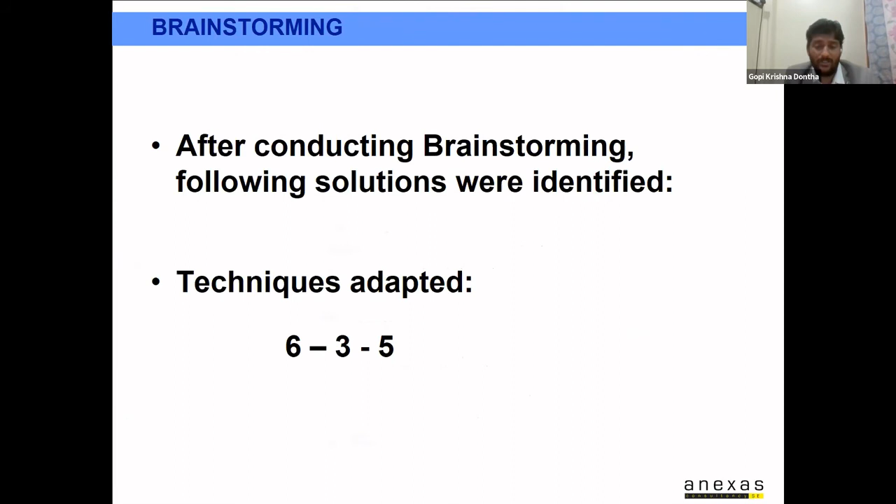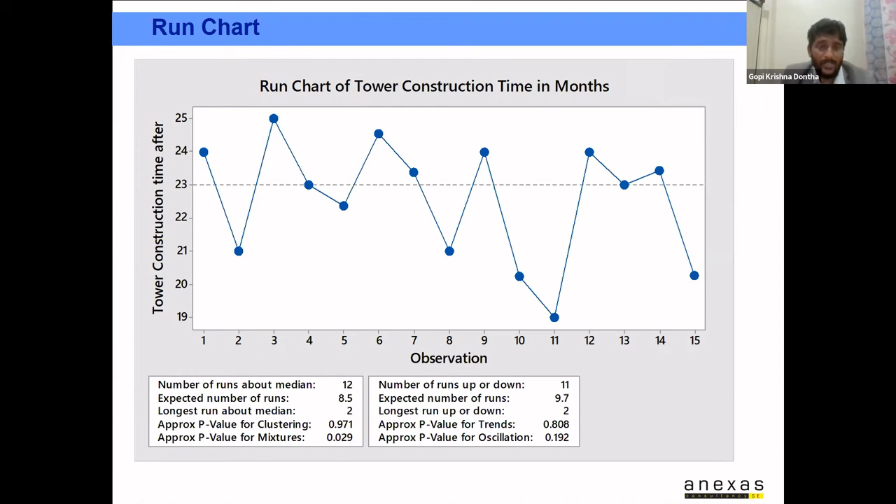After implementing the solution, we further collected the data, I think 15 samples, 15 projects' data, and this is a run chart. Then we performed the capability comparison before versus after. Then this is the improvement. So earlier we were having 66% defects, and after implementing the solution, the percentage has reduced from 66 to 21. Okay. And is it significant? Yes, it is significant.

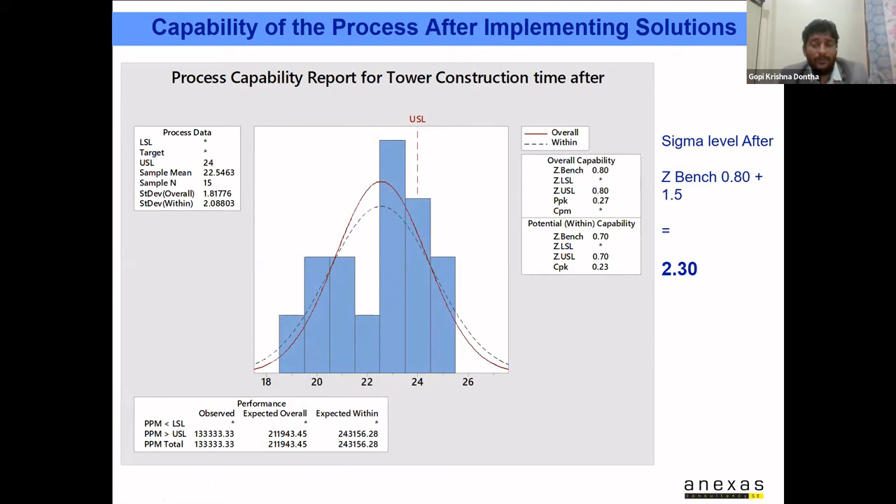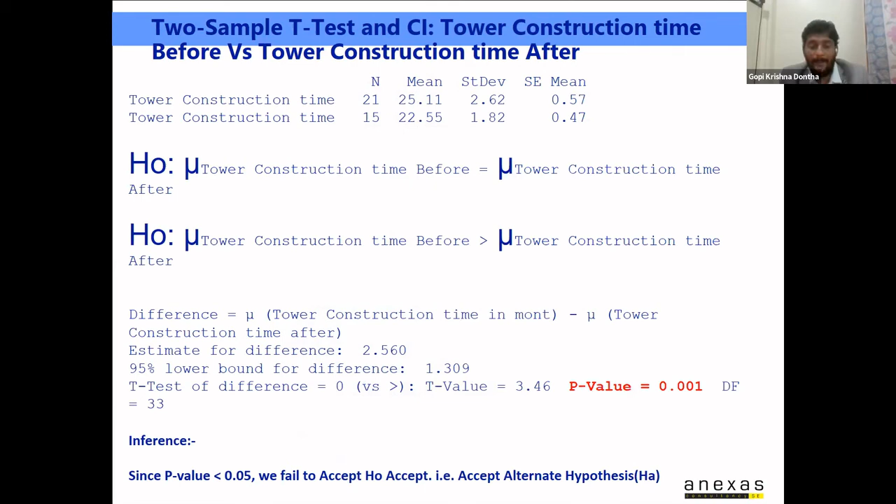So this is the capability after implementing the solutions. Earlier it was 1.07 sigma. Now after implementing the solutions, our sigma level has improved from 1.07 to 2.30. And is the improvement significant? We did a 2-sample t-test before and after, and the p-value was 0.001, which means the improvement is significant.

Then after looking at the improvement, we move to the control phase, and we measured the controls. We plotted the control charts to understand whether the process is in control or out of control. So yes, it seems that the process is in control and performing well.

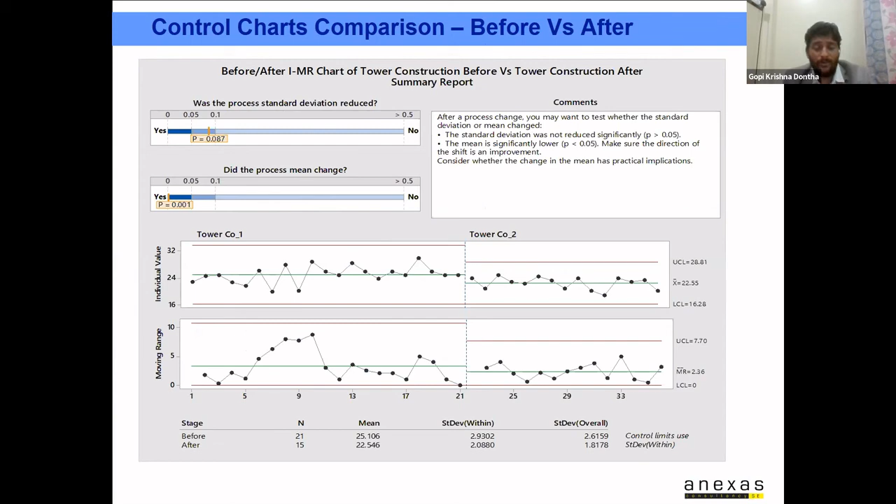Earlier we were taking 25 months to construct the tower. Now after implementing the solution, it has reduced from 25 to 22 months.

Once we saw the improvement, we made a control plan so that the construction time would not take more time. We made a control plan specifying which activity needs to be verified, who is the responsible person, the frequency, and what action needs to be taken if the responsible person says the activity is going out of control. Then after implementing the solution, these were the benefits before Sigma and after Sigma.

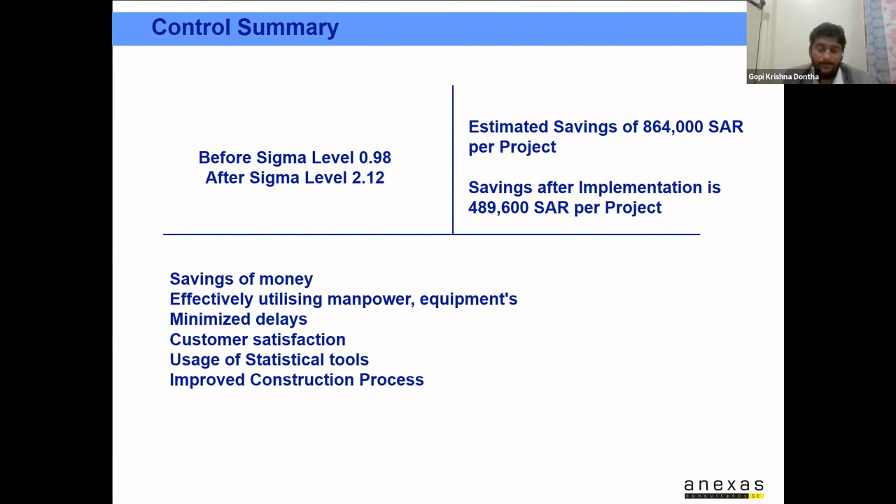And the monetary benefits, the savings, are approximately 489,600 SAR. So these are the cost benefit analysis after implementing the solutions.

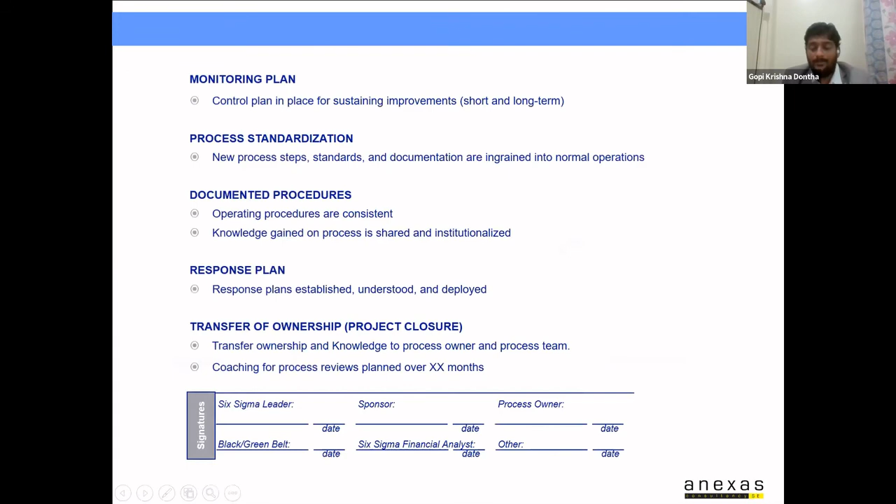So this was about these 3 improvement projects from manufacturing and service organization.

Wow, Gopi, that was really fantastic, and thanks for sharing these projects. Any one thing you would like to tell our budding black belts and green belts? Anything you would like to tell them? Would you like to say something to them? Any message or any guidance?